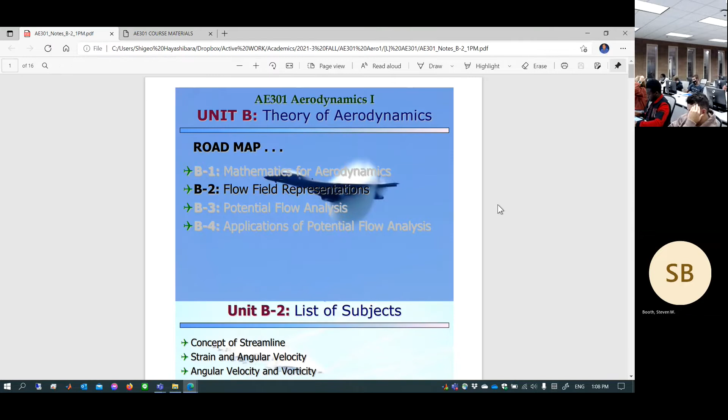Okay, so we're going to move into Unit B2 today. Unit B2 is an introduction to a very central component of this class. Get ready to dip yourself really deep into aerodynamics - so anyways, aerodynamics itself.

So lots of people, I assume you are all aero track students of aerospace engineering major - what is aero? Somebody please give me your image of aero. Oh, this is aero, this is why I chose this school, this major. I thought this is aero. What's your image? Go ahead, Robert.

For aeronautical engineering, aero track - is that what you're asking? That's who you are, so what kind of image do you have? Suppose if I choose Embry-Riddle and become an aero track student - oh, this is something I'm gonna run, oh cool, it's like an airplane. Something like, oh, maybe wind tunnel testing, it's so cool. Or something like design of an airplane - do you think so? I think it's... oh, that's aerodynamics, aero track.

Yeah, haha, heck no. I'm sorry to completely wreck your dream and image, but okay, so that's probably supposed to be your image, right? Okay, good - oh, that's so cool and everything, it's aerodynamic, it's like a streamline shape and all that. No, sorry, I hate to be very negative, but it's essentially this. You don't want to hear this, but oh my goodness, that's what it is. So this unit is all about this.

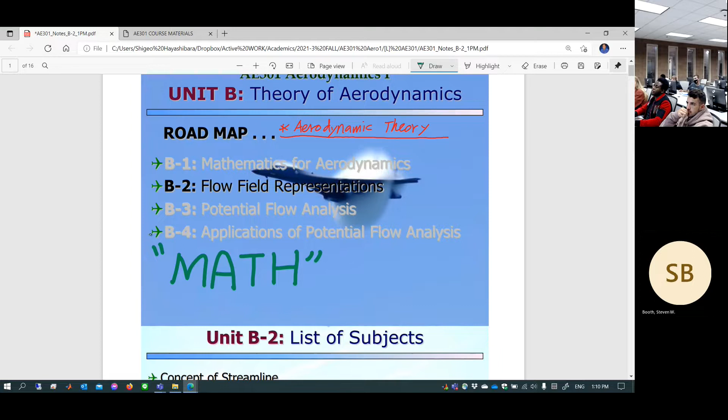Okay, unit... oh, there's a whole unit, unit B. Just is unit, everything is this. I thought you meant the...

Mathematics, aerodynamics theory, mathematics, 100% purely mathematics. Then you go like, oh my God, you lied to me. You sell this school's image like, oh, this is aerodynamic. Well, what's the name of this school? Embry-Riddle Aeronautical University, something like that. Aero, close enough.

Oh my goodness, so be ready to dip yourself really deep into mathematics. Unit B is 100% mathematics, nothing real. So you feel as if, wait a minute, what's this class? Am I taking a math class? As long as Unit B is concerned, you are taking a math class.

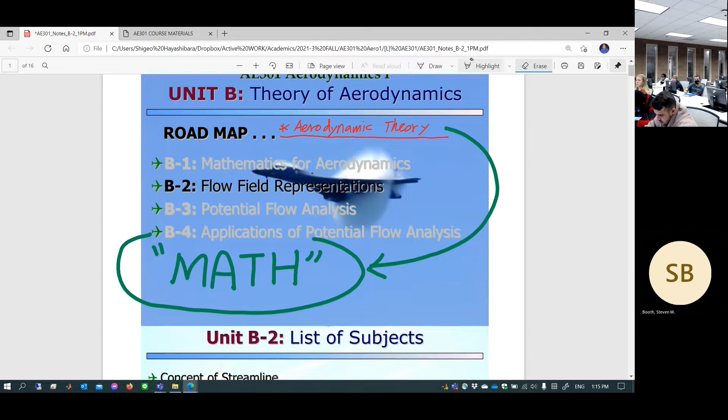So those are very philosophical talks that I can guarantee you'll encounter at any job interview from now on. The interviewer will ask that question, because I'm the guy who keeps telling them, hey, ask this question. Because you're going to find out if this person knows aerodynamics or has no clue. You can detect it with just one thing - ask this question: what is this equation? Then you go like, huh? Or, oh, I know this, this is the Laplacian, oh, this is the governing equation of aerodynamics. I can solve this with this method, and I can even draw streamlines using MATLAB. You get the job.

Okay, so anyway, prepare to understand this - this is now the fusion of math into something real. If you fail to connect math with something real, you probably fail to be an aerodynamics major. What's your major? Your major in aerodynamics? Aerospace aerodynamics major, or something like that, aero major. Anyways, aero means aerodynamics, isn't it?

I believe so, okay, anyways. So I'm going to introduce you to lots of physical concepts combined with mathematical expressions, and then let's find out what each mathematical expression means in a physical sense. Always some kind of mathematical expression means something in physical space. Otherwise, you can never use such a tool.

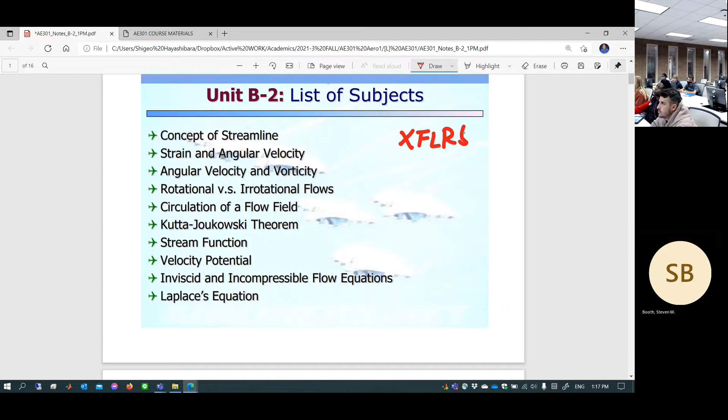So at the end of the semester, I'm going to introduce you a software which a few people are already using. XFLR5. It is actually made up by Xfoil.

Xfoil is a single analysis tool. In other words, you're given a single cross-section, single condition, and you can determine lift, drag, moment, and other things. How do they determine such a thing? Anyways, you are going to run a series of Xfoil in software called XFLR5. It's a batch analysis of lots of Xfoil inside one software. By doing so, you can actually use that Xfoil for airplane design.

Now, bottom line question is, how on earth can you use the software to predict the performance of aerodynamics? What's inside of this software? Of course, equations. So how we develop equations inside of this software is all about this unit.

In other words, if you know this unit, you know aero. Let me tell you one thing. A high school kid down the street can pick up this software and run it as a black box.

So they throw some numbers in, get some numbers out, and then present at Washington, D.C., saying, oh, our team found lift coefficient 25 and drag coefficient 6. I'm going like, are you insane? What kind of airplane is that? It's probably even worse than a rock. You throw a rock in air, it's probably better than that. Do you call that airplane?

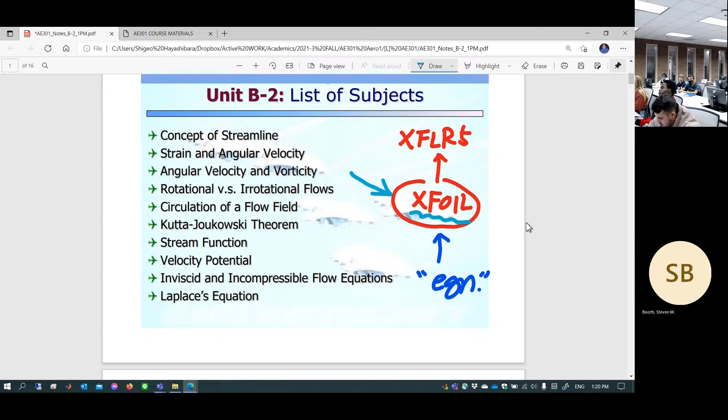So somebody please tell me, what is a streamline? Physical sense. Is it like a plot? Go ahead. I would say like a plot of different individual... Suppose you see a streamline drawn in a flow field, something you have to do in Project 2, A to B. If you show that kind of thing to someone else, what kind of information would you expect to have from that streamline plot?

What kind of information can you get? Go ahead, speak up, you don't have to raise your hand. Velocity vector. Yeah, tangential velocity at the surface. Okay, so he's saying a very important thing. In other words, along this path, at any location you choose, velocity is always tangent to the path.

That's the only information you can actually get by looking at the streamline. It's insanely qualitative information. So if you get into the wind tunnel and do smoke wind tunnel testing, and draw streamlines in the flow field, what kind of information can you get? I think I have a video. Did I show you a video?

I don't know, I just don't remember. Did I show you a video of a streamline? No, not really, not really. I tried to find it. I don't know where it is.

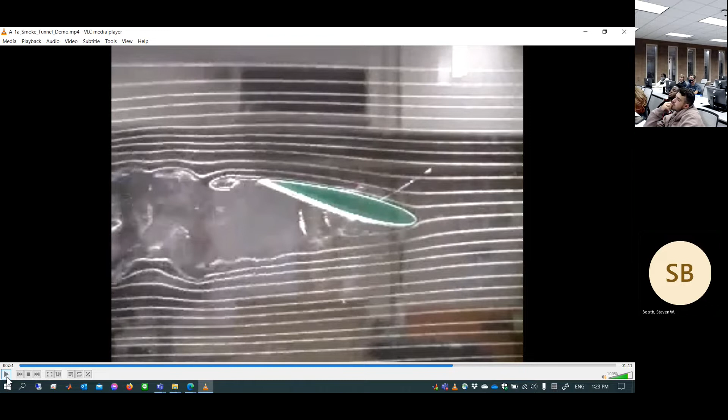Flow-based. What kind of information can you get from this? Not so much, actually. You can only tell if those are streamlines. Velocity is always tangent to the path, so you can tell the overall general direction of the flow field. That's the only thing you can get. If somebody asks what is the velocity here, you have no clue. And this region is highly unsteady—how can you mathematically represent that kind of region?

It's possible, but you need a monster computer—CFD. And then what kind of turbulence model are you going to employ? That's a big question. A turbulence model might work very well for this kind of flow field, but it doesn't work at all for this turbine kind of flow.

Go ahead—for wherever the flow is unsteady, the only part of the velocity vector we get is the direction, not the magnitude, right? You can never get the magnitude of anything from this. This is flow visualization, a fairly qualitative thing. In order to get the velocity magnitude, you have to insert a probe, maybe a pitot-static probe, to determine airspeed at a certain location. But inserting something disturbs the flow field—is it really not affecting your measurement?

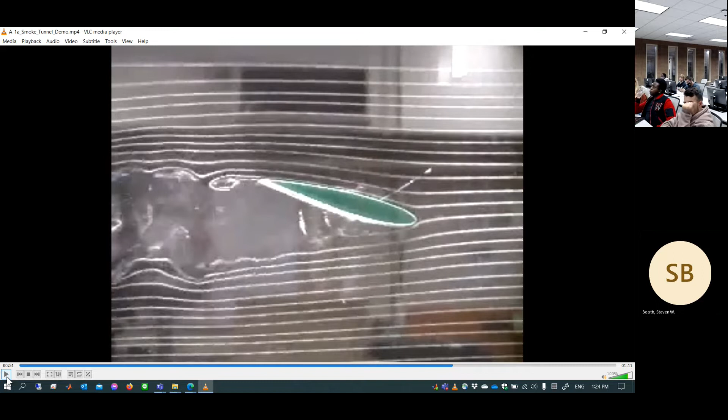I'm not sure. Again, this is aerodynamics. So, do you think aerodynamics is easy? Easy means easy physics—deterministic physics, like structures. Structures is super easy, you know what I'm talking about, because everything is deterministic, everything is algebraic. Aerodynamics is never algebraic, so inherently, physics-wise, this is complicated. You have to deal with mechanisms that theory people still don't fully understand. So we are going to simplify everything to the maximum extent. That is the concept of potential flow theory—that's what we'll cover in this unit.

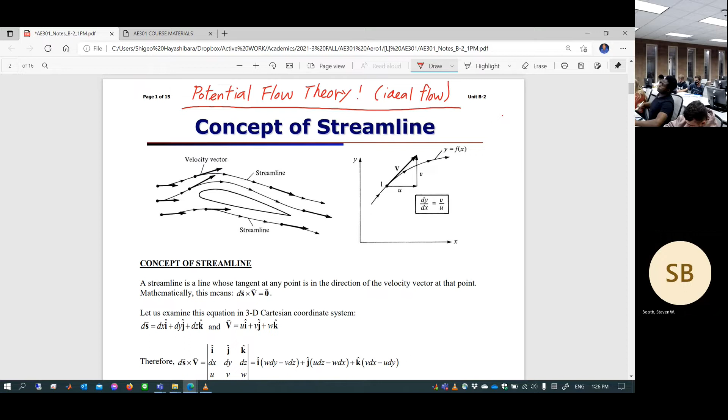Potential flow theory—what is potential flow? You have to find out. Why 'potential'? Oftentimes this is called ideal flow theory—ideal flow. So first we are going to make everything as simple as we can, then we can solve a very simple flow field equation mathematically. That's the whole idea.

If you cannot solve something mathematically, you can never develop software—software is based on mathematical theory. So what kind of math are we going to use to begin with? First is the streamline. A streamline indicates that along this path, the velocity is tangent to the direction. Have you ever seen this equation of streamline from fluid mechanics?

Have you ever seen it? This is not a very strange equation, because if you try to understand its meaning—dy/dx is the slope, the slope at a given location of this path—it equals the ratio of the velocity components in y and x. That means the tangential direction is the direction of velocity.

That's what this equation talks about. From now on, when you look at any equation in this class, try to translate it into your own language. What's your own language? I assume it's English, right? So in English: the slope of this curved path is equal to the ratio of the velocity components y and x. That means the tangential direction is the velocity direction. This is the equation of a streamline.

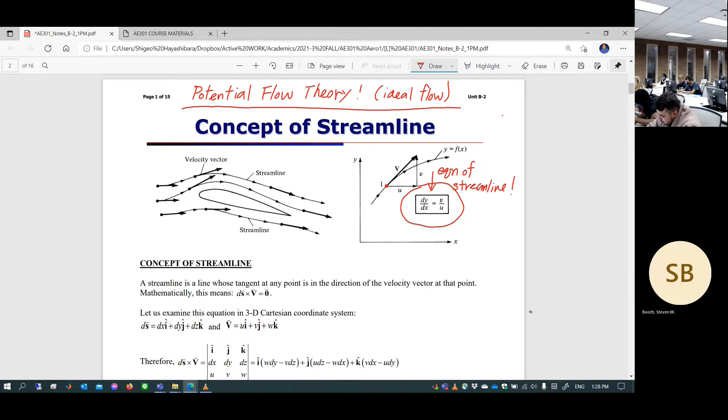So how do you get this equation? Let's try to derive it. The derivation process is simple. Have you ever looked at ds coming from unit B1? Somebody please tell me what ds is.

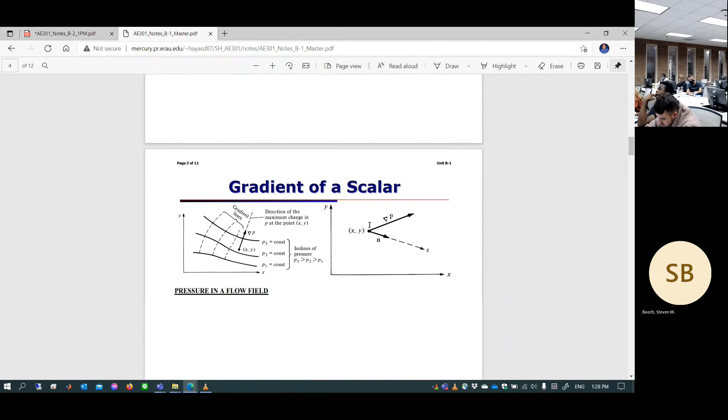Okay, let's go back to unit B1. Suppose, unless you are threatened, you're not going to even look at the notes of B1. So let's take a look at the unit B1. What is ds?

So when you do a line integral, you need to use ds, right? ds is a line vector. So this thing is ds. Okay? So ds, the magnitude is ds.

S is a curved coordinate system, sometimes called the streamline coordinate system. You're going to choose the differential lengths of ds along the curved path. Magnitude is ds, and direction is tangent to that curved path. It's called the line vector. So you're going to define such a thing called line vector in any curved path. Do you understand? That's ds.

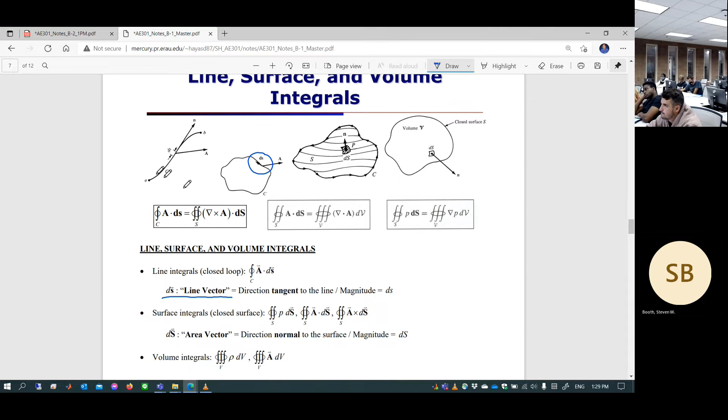Okay, having said that, let's pick up the ds. Let's just pick up ds right here. So this is like a ds, small tiny thing. And then you're going to turn it into the ds vector. Let me change the color.

So I'm going to change it to ds vector. ds vector has magnitude ds, direction tangent to the path. So this is called ds, the line vector.

You guys look at the unit B1, okay? I mean it. So suppose this is the ds line vector. Direction is tangent to the path for a given location, magnitude is ds, okay? What is the velocity vector at that same location? Right here. Of course, velocity is something like this, right? This is the velocity v, right here at the same location.

So if this line needs to be a streamline, if you take a cross product of ds and the velocity, this should produce the zero vector, isn't it? Because this is, by the way, the definition of streamline. The physical sense of a streamline is that velocity is everywhere tangent. So let's just take the line vector of a path at any location, take a cross product against the velocity vector. It should always be zero vector, isn't it? Because it's in the same direction, right? So this is the mathematical definition of a streamline.

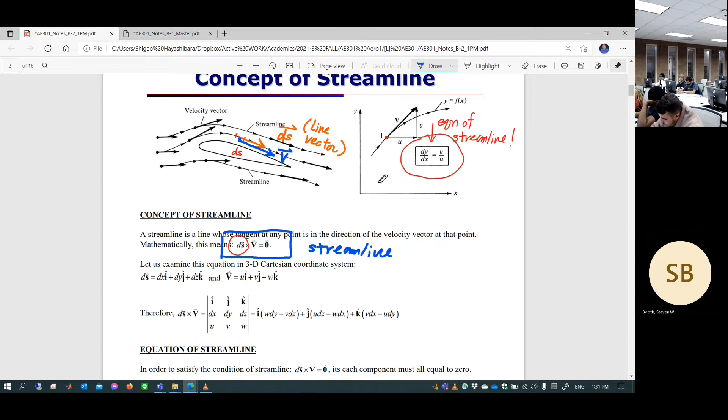Okay, so starting from here, you can choose any coordinate system. Now I happen to choose the Cartesian 3D coordinate system, xyz. So I'm going to represent the line vector as dx i, dy j, dz k. Velocity is, of course, u i, v j, w k. So this is a 3D Cartesian coordinate system. Line vector and velocity, take a cross product. This is the result, right? And this must be equal to the zero vector, isn't it?

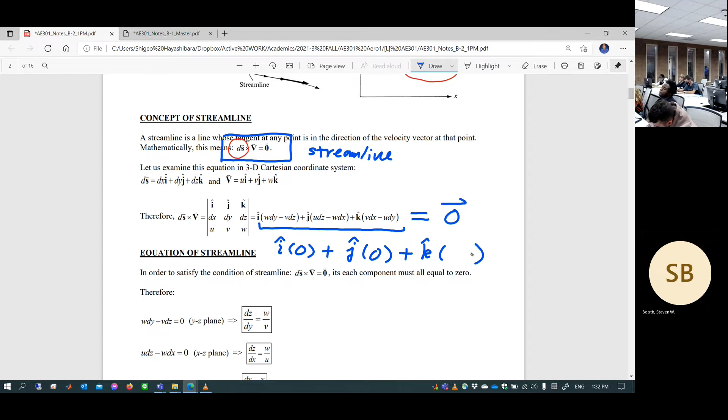Zero vector means 0 of i, 0 of j, 0 of k. That's the zero vector, okay? Every component in three directions must all be zero. That's the meaning of zero vector, okay?

So this actually gives us three equations. In other words, w dy minus v dz must be equal to 0. u dz minus w dx must be equal to 0. v dx minus u dy must be equal to 0. You get three equations coming up. Those are the three equations of streamlines in 3D space.

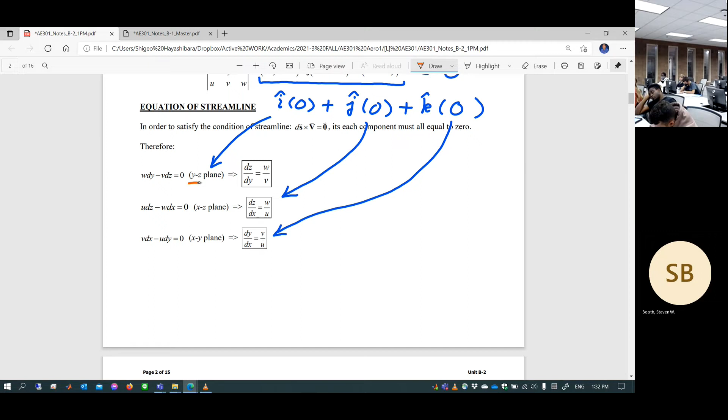So this is, each one of them represents the streamline for each corresponding plane. This is the YZ plane, this is the XZ plane, and this is the XY plane. So for each plane of 3D space, you're going to define the equation of streamline. What do you mean by that? Somebody please tell me this meaning.

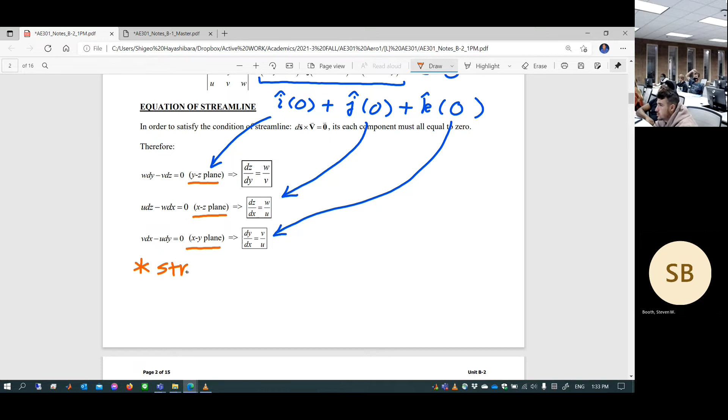Let's interpret. Streamline is essentially a 2D concept.

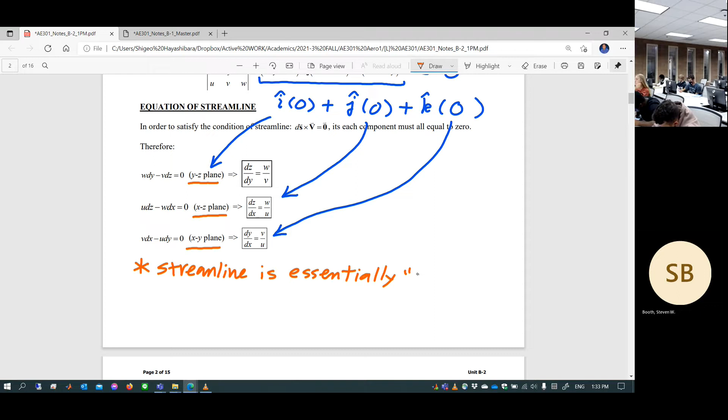So you've been dealing with the concept of streamline. Starting from fluid mechanics, you picked up, okay, so this is a streamline. So what really is the streamline? Now you know this is a mathematical function, and you can only define it on each 2D plane.

So suppose if you have a 3D flow field and you want to represent the three-dimensional flow field streamline, how would you do such a thing? You are going to determine the streamline on 3D space, on each plane. So this is the equation for this plane, that plane. You are going to project it to create the three-dimensional streamline.

By the way, if you do a computational fluid dynamics analysis, that's exactly what the software does. You can never compute a three-dimensional equation of streamline. It's impossible because streamline is a 2D concept, mathematically speaking. You can, of course, project it to make it look like 3D. That's the only thing you can do. Okay? So streamline is a mathematical concept.

So from now on, if somebody says casually to you, oh, you know, my car is so streamlined, it looks so cool, okay, so give me that equation. What is the equation of your car's streamline? Because, yes, we have that kind of stuff. In order to know that, you have to go through projection. Projection, of course, you have to know each line's equation to draw a streamline onto the surface. Yes, so it's a very legit question.

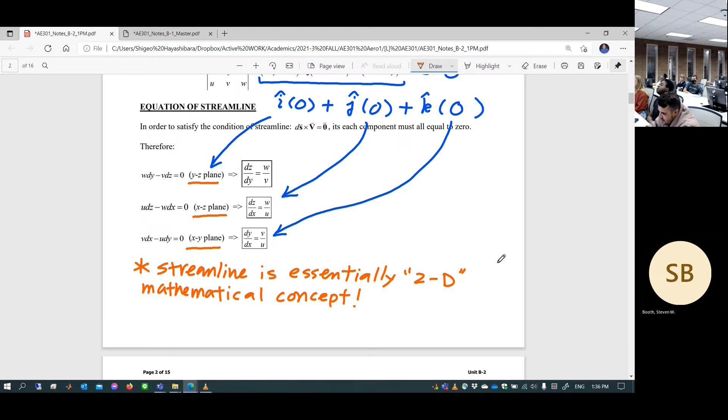This is the streamline concept. If you have a streamline, you have to orient your X, Y, and Z planes to match it - it's a projection from each plane. Because a 3D flow field is very difficult, you have to resolve each plane and then project it to construct the 3D flow field. Computational fluid dynamics is always like that. So those are the three equations of a streamline, and of course you know one of them from fluid mechanics - this is the X-Y plane streamline equation. This basically tells you that the direction tangent is the direction of the velocity. It's very simple.

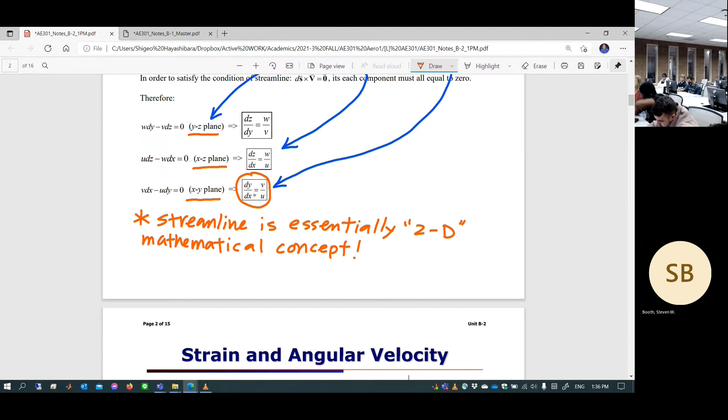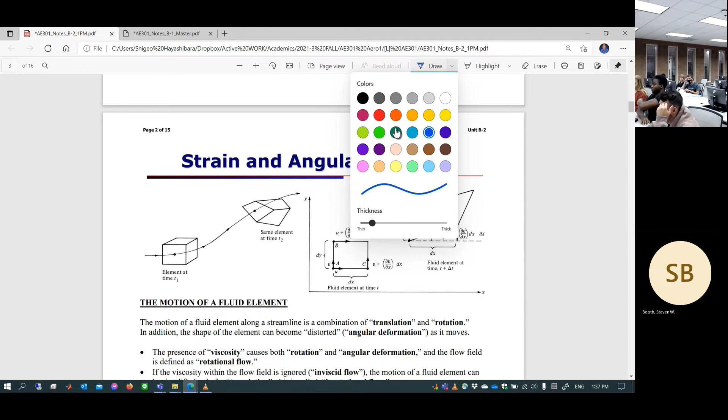Okay, next page. Oh my goodness, do I have to do that? Yeah, I have to do that. So now, oh my goodness, I hate doing this, but anyways, what am I going to do here? Well, this is viscosity. Do you want to include viscosity?

In other words, when you analyze the flow field, a student might come in and say, Dr. H, I have to do CFD. Okay, go ahead, start using the software. So I'm going to do a three-dimensional, fully unsteady, highly turbulent turbomachinery CFD, and by the way, I have to do it by next week. Forget it - you'd probably spend another 5 years and still not finish it. In other words, what kind of physics do you want to include?

Start from super simple. What is super simple? Let's begin with some kind of 2D shape, not even a cross-section of a wing - maybe, I don't know, a circle. Cross-section of a circle placed in the flow field, uniform flow comes in. Do you want to include viscosity or completely ignore viscosity? That's the question. Do you want to include changing density or not? In other words, is it low speed or high speed? Do you want to include temperature change or not? So those are the physics you want to include.

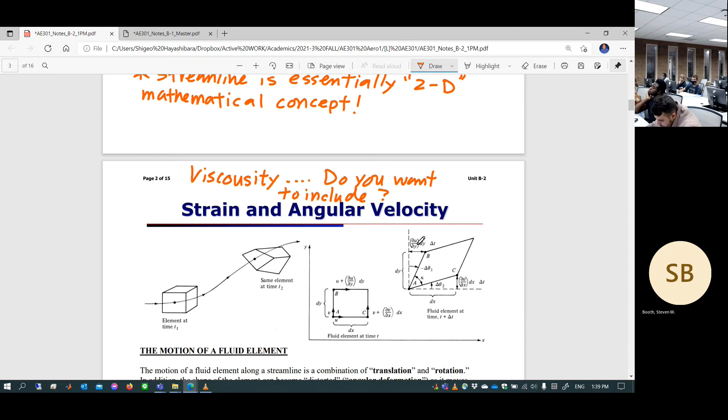Do I have a video? I think I have a video of what I'm talking about. Let's see, I'm going to repeat over and over, but suppose if you include the viscosity, what do you - sorry. Okay, suppose if you include viscosity, what kind of things do you need to include in your flow field?

Of course, a boundary layer. If you include viscosity, every surface you introduce in the flow field is going to develop a boundary layer. What is a boundary layer? It's a very thin layer, very close to the surface - like a curved path, maybe a circular cross-section, with flow going over it. If you include viscosity, you develop a boundary layer: velocity is zero on the surface, gradually increasing to the incoming velocity. If you completely ignore such a thing, what kind of equation do you deal with?

If it's inviscid, what kind of equation do you deal with? Euler's equation completely ignores the viscosity, so you don't have to do this.

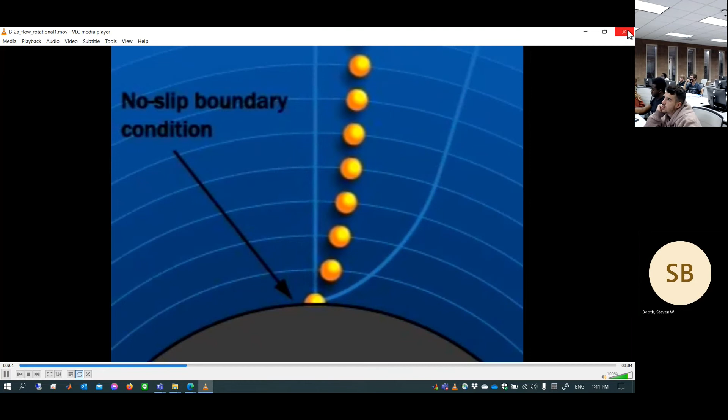So let's say you have an originally cubic shape of a fluid element, could be air. This moves around the streamline. Now if there is viscosity present, not only does it move from one position to another, it actually changes shape. Oh my goodness, it deforms the object.

You have to keep track of that with some kind of mathematical model. How easy it is, I don't know. This is what's going on. If you include viscosity, you have to deal with the original cubic shaped element. As it moves along the path, it changes form—it deforms and rotates.

What kind of deformation and rotation is going to happen? You have to mathematically describe it, angular deformation and all. If you completely ignore viscosity, you can avoid this. Which one do you want? Of course, you want to avoid it.

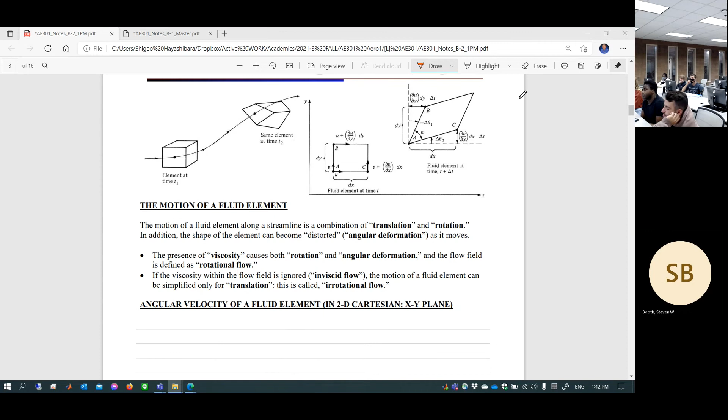But it's so amazing, all those seniors come into my office and say, hey Dr. H, I have to do CFD. By the way, this is what we need to do: fully turbulent, three-dimensional, unsteady, with some kind of turbulence model, and I have to do it in one week. What are you thinking? I don't think you can do that.

So I always say start with the simplest possible thing. Some kind of simple cross-section, 2D, not even viscosity—turbulent, forget it. Viscosity, forget it—Euler's solution. Low speed, density constant, that's even Bernoulli. That means you can do it by hand. Go ahead, do it by hand, then run it in simulation and find out if it matches up. Then you add one more model after another, make it gradually more complicated physics. Lots of people do the opposite and get all kinds of garbage results.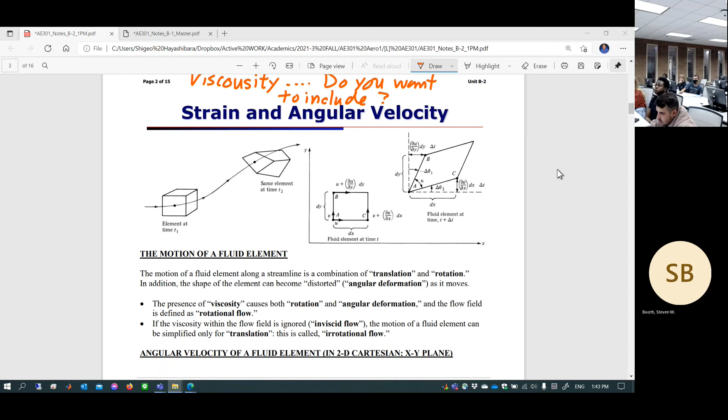That's what the high school kids do. Okay, so I'm trying to purposely procrastinate getting into this subject, but anyway—so next class, okay?

Go ahead, Michael. Were we going to finish section A5, the third example problem? Or is that on our own? It's a flight mechanics kind of discussion, probably not relevant to Aero, but if you have a question I'll be happy to answer. Any other question? We just have to read it, the example. I think I talked about it—A5, last page, right? Yeah. Oh, I don't—I'm not, just trying to wait five minutes.

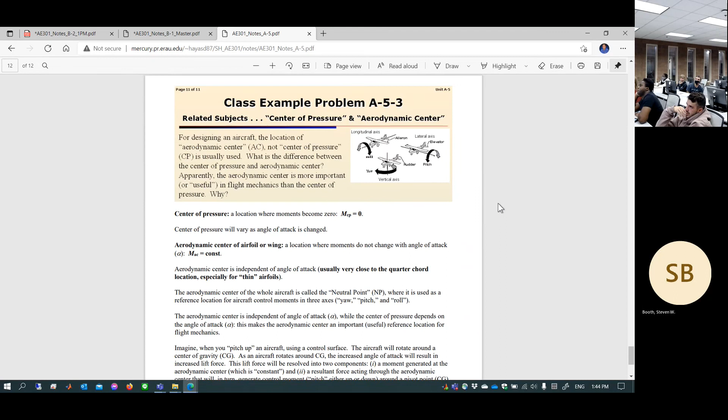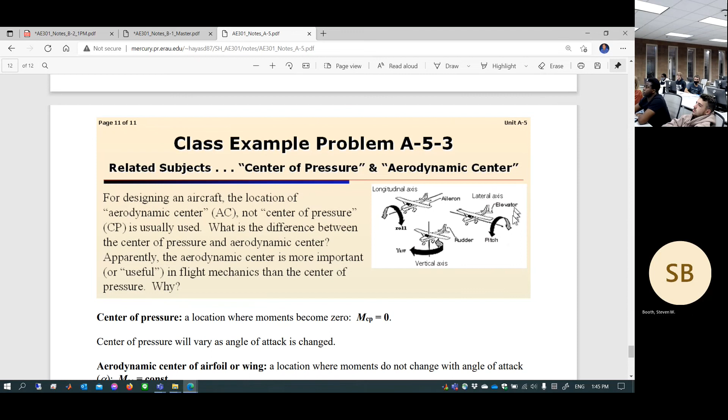This is just a discussion of how center of pressure and aerodynamic center are used for flight mechanics. In Aero, we find the location of center of pressure and aerodynamic center, however the actual use of those things is flight mechanics, so this is not an aero subject. That's why I give you all the discussion here—if you have any question, I'll be happy to answer.

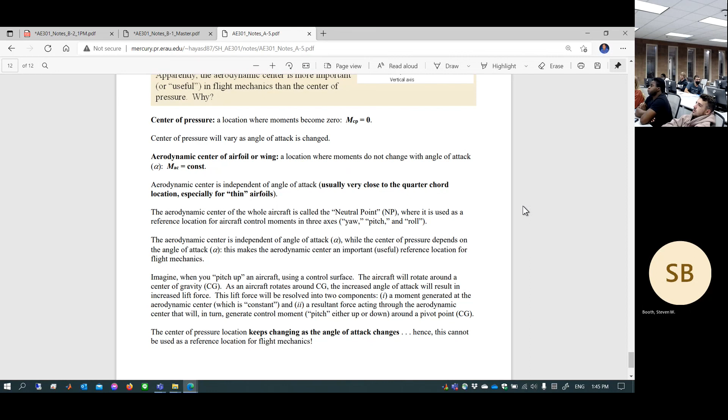So next class, here's what we are going to do. This is the element at the original location at time t, originally cubic shape. But over time delta t, from t1 to t2, it moves position and at the same time rotates and deforms. Why is that? Because of viscosity. How can we mathematically model such a thing? We are going to derive that equation in the next class.

Question: is that with the assumption that all side lengths stay straight and don't bend as well? Yeah, that's probably one of the simplification assumptions—those edges remain straight and only rotate. That's a fairly correct assumption actually, because as you saw in the video, that's what happens. Mathematically we're probably not going to deal with it in detail, but we're going to show you this mathematical model to include viscosity in your analysis. You probably don't want to deal with it, but if you want to include viscosity, that's the mathematical model you have to employ.

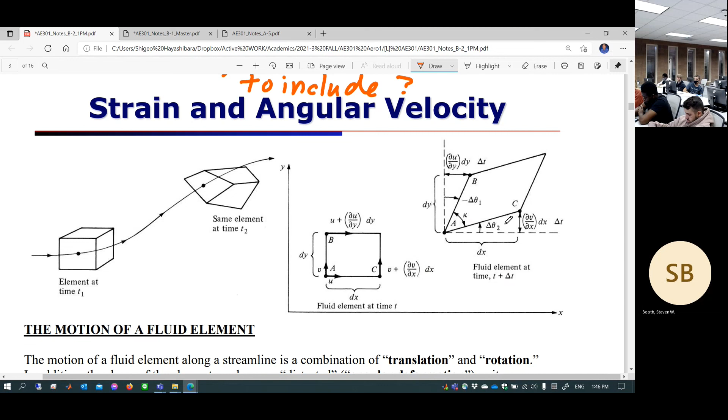In AE301, we almost always assume it's inviscid. Any questions? So we're going to stop here, and next class we'll take a look at the mathematical model for this.